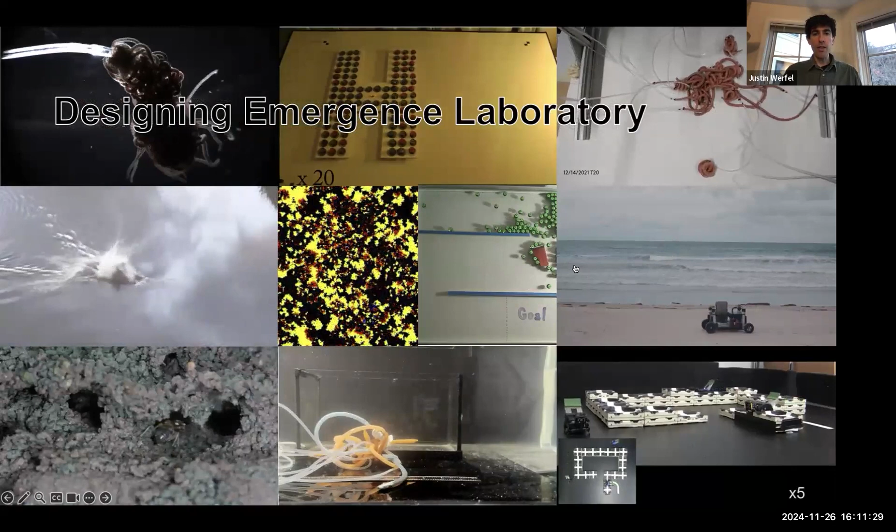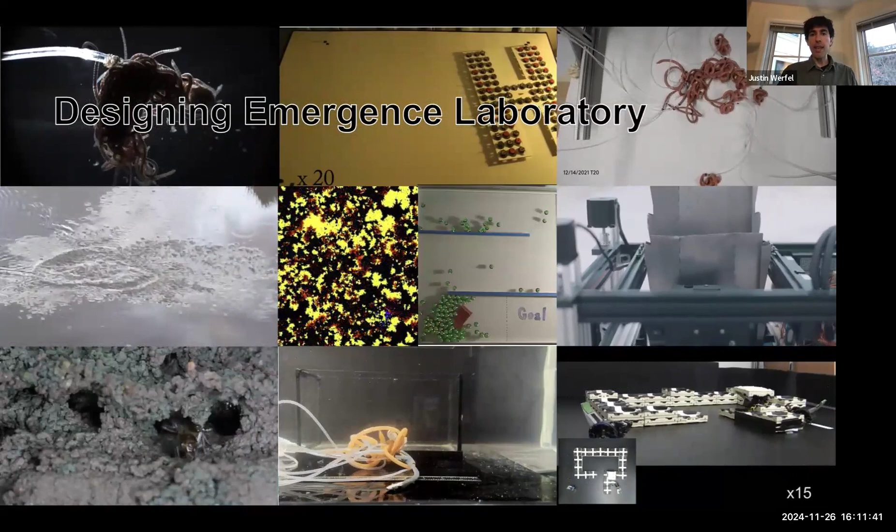So my group works in different topics in collective behavior. We study natural systems to get inspiration, and to get an understanding of what principles nature uses that we can then adapt, and then we engineer systems explicitly inspired by the biology, but not limited to mimicking the biology.

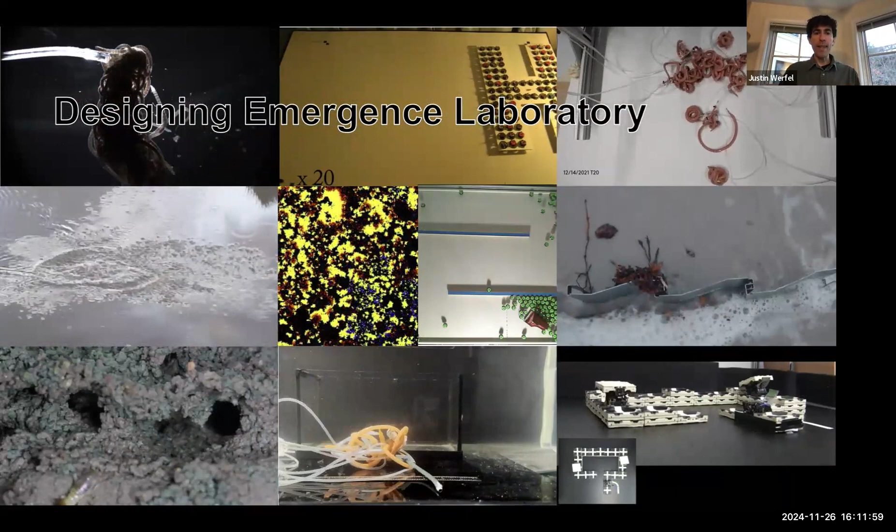The feature that all of this has in common is the collective part of it, right? It's that you have groups of many independent agents that together are doing something interesting beyond the capability of what the individuals can do.

So there are two different kinds of questions that we ask. And I can't seem to advance this slide, so give me a second.

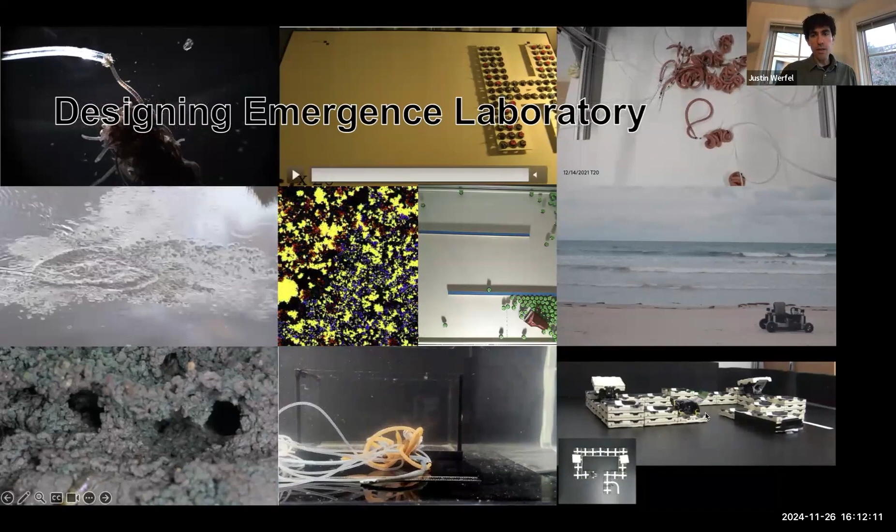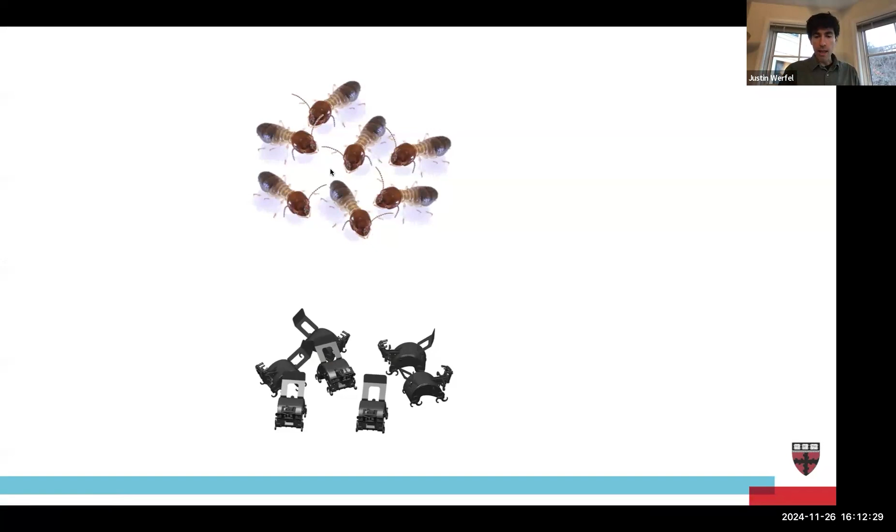Okay, so in studies of natural systems, the questions that we ask tend to have a scientific flavor. For instance, suppose you've got a group of mound-building termites, and you look at the thing they do together, in this case building a mound. The forward question of emergence is how is it that the individuals and the rules they're following, the behaviors of the individual agents, lead to these collective outcomes?

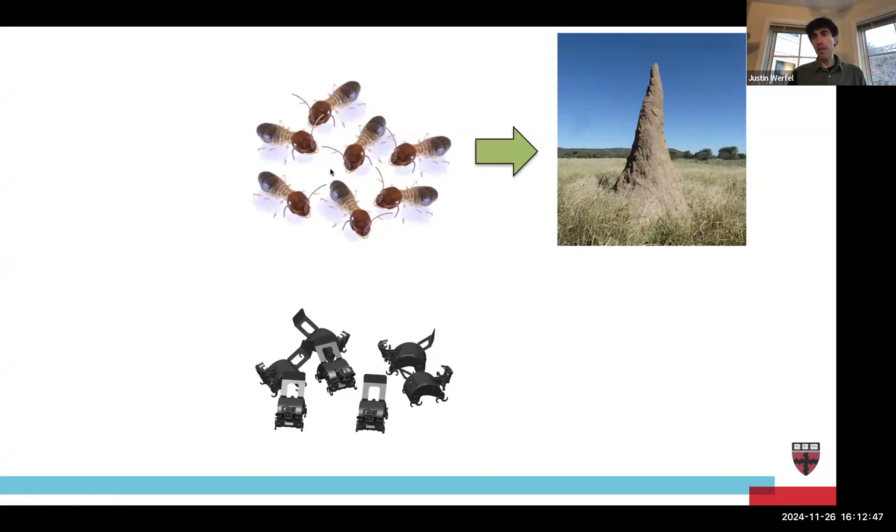Then for an engineered system, we ask an engineering kind of question. There's a particular outcome that we want to ensure. Suppose, again on the theme of building, that there's some specific building we want to construct, and we want to come up with a set of rules for the individual agents to follow that will lead to that outcome and not to something else.

The things that make all of these different topics challenging but also really interesting are the usual things I think you've been covering in the seminar course, right? Everything is unreliable, is limited, is unpredictable.

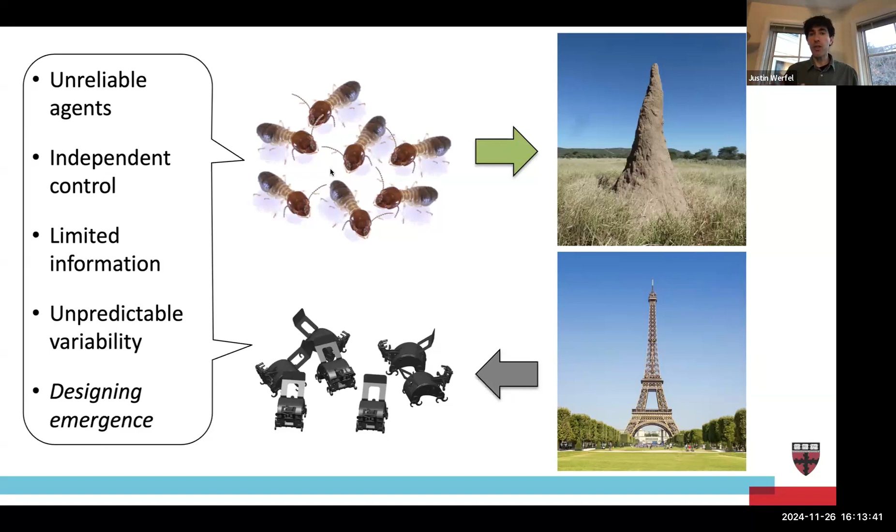In general, we don't have principled ways of connecting these individual and global levels of description of the system. We're looking for ways to connect those, and if general principles exist, great, but right now we try to do things really on a case-by-case basis in order to make some progress.

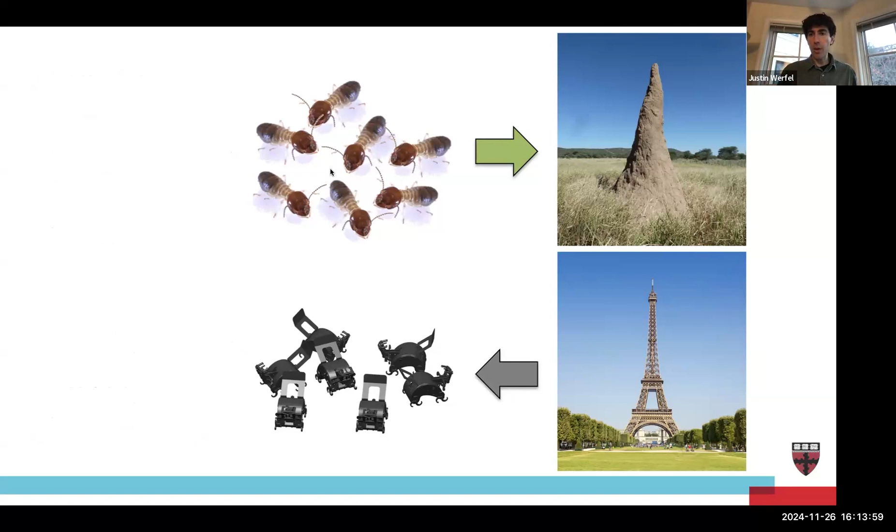These days, everybody is very much focused on AI in the modern machine learning sense. So I'm going to wave my hand in that general direction and say there's obviously a direct mapping of what I'm showing here onto neural systems. On the natural side, individual agents are individual neurons, and the collective outcomes are things like cognitive phenomena.

Engineering-wise, you've got some particular thing that you want a robot or an agent or an artificial intelligence to do. And the recently very successful way of doing that is you have some learning rules that let you train a network of units to produce some approximation of that behavior.

The thing that I would point to as being a meaningful distinction between these systems and the kinds of systems that I want to focus on in the rest of this talk is what you might call—and in fact the Philosophical Transactions of the Royal Society called—the difference between liquid brains and solid brains.

So a solid brain is, for example, a brain, right? The important thing, I guess, is about the persistence of the connections. In a solid brain, if you've got one neuron affecting another neuron, the strength of that influence may change, but in general you can expect that in the future that same unit is going to influence that same unit. You have some ability to rely on the connections being persistent.

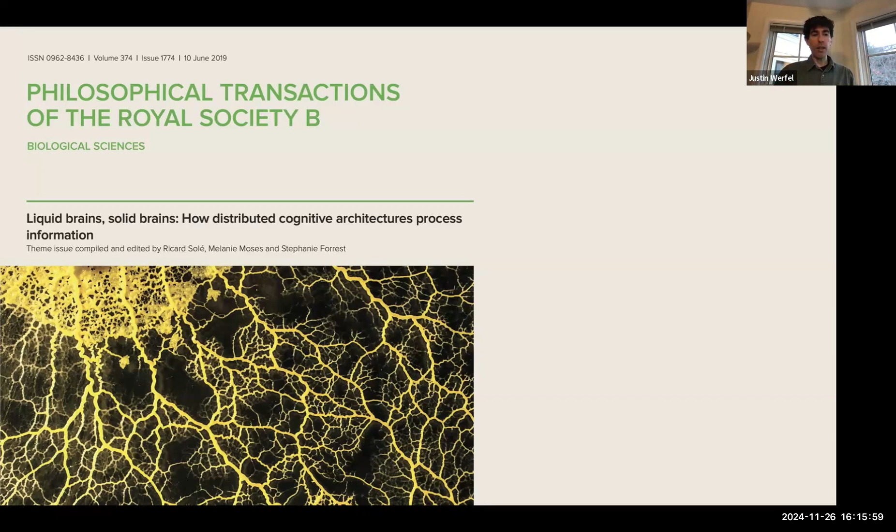And so there is, in a sense, that much more flexibility, but there's also less to rely on, fewer regularities, fewer things that are consistent. And so you can ask, if you have one of these liquid brains, how is it that such a brain can learn? How can it store information if there are no persistent connections between units?

So there's a few different places where that information can be stored. I think the most obvious one is that the individual units, the single robots or the single ants or whatever, they can individually learn.

You can have information stored in the interactions between agents. So, for example, if you're talking about things like formation control, which you might have talked about in a previous lecture, the way that relationships get set up, even if it's not long-term persistent, you can store information in that, if relationships hold at least short term.

The one I want to focus on is this third one. This is, I think, sort of the classic one for social insects. So it's not storing information in the agents at all. It's taking advantage of the thing in the environment that is actually persistent, since the locations and relative positions of the agents are not persistent. But the world tends to stay where it is, right?

And so if you can put information into the environment, it's available, hopefully later, in the place where it's relevant. So for social insects, that broad idea is usually called stigmergy.

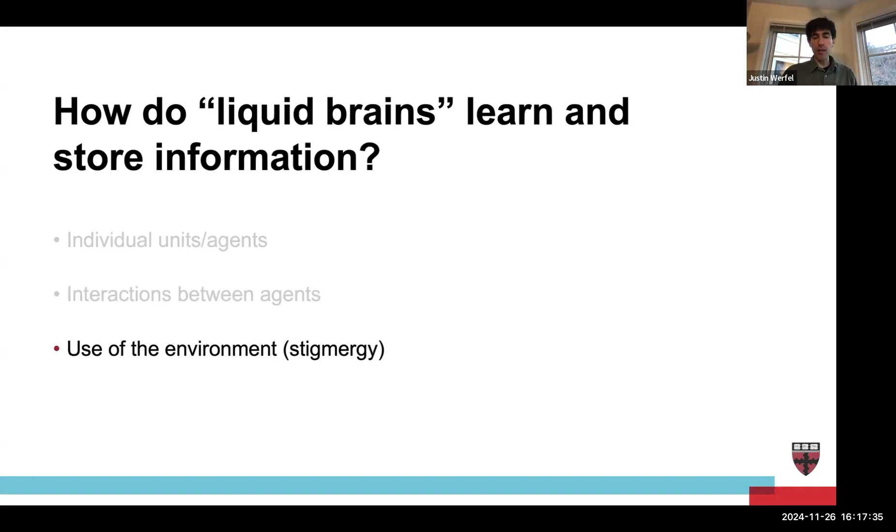I think the most famous example is ants with their foraging trails. They're leaving these pheromone trails in the environment, and it's basically physically embodied. This chemical in the environment is telling ants that come to that place that there's food at the end of this trail, that there's something worth following, and that information is stuck to the ground.

Another particularly compelling example of stigmergy is the mound-building termites you get in Africa and Australia, and to a smaller scale in Asia. Here you've got colonies of millions of these individually limited agents—I used to say simple, until I got a chance to study termites. I will never say simple again describing termites—but these millions of limited agents literally blindly build these huge, complicated structures.

So the conventional wisdom for the last 60 or 70 years has been that the way they coordinate their behavior is through the use of what's called a cement pheromone. The idea is one termite will come and put down a blob of mud someplace that it has put some pheromone into, and then another termite comes along, encounters that first blob of mud, and responds to the pheromone by putting down its own blob in the same place.

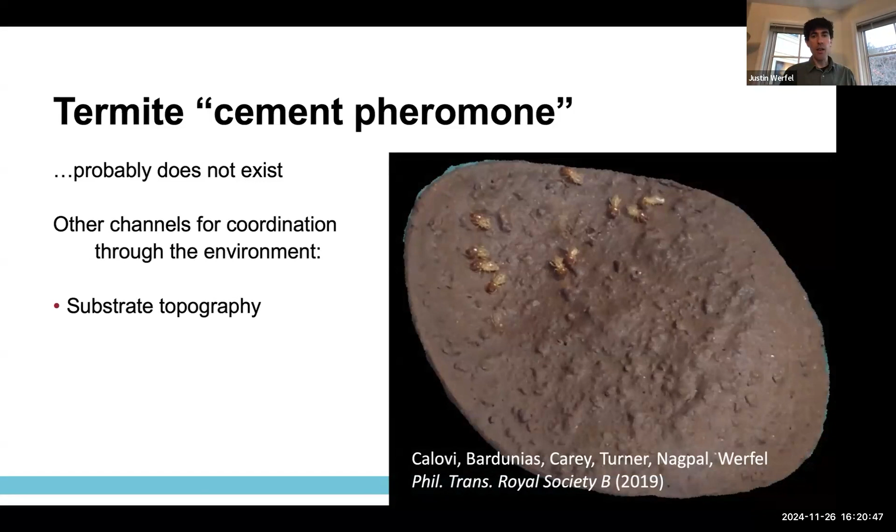So there's that feedback very immediately through the environment. Another thing they look at is sharp changes in humidity. Particularly, this is something that looks like it affects how they expand the mound. There's a sharp transition between very humid air inside the mound and

very dry air outside it. And depending on the time of day, the location of that boundary changes. I don't have time to go into a lot of detail about this, but it looks like that is kind of the driving thing that leads to their expanding the mound at night, but closing it off during the day.

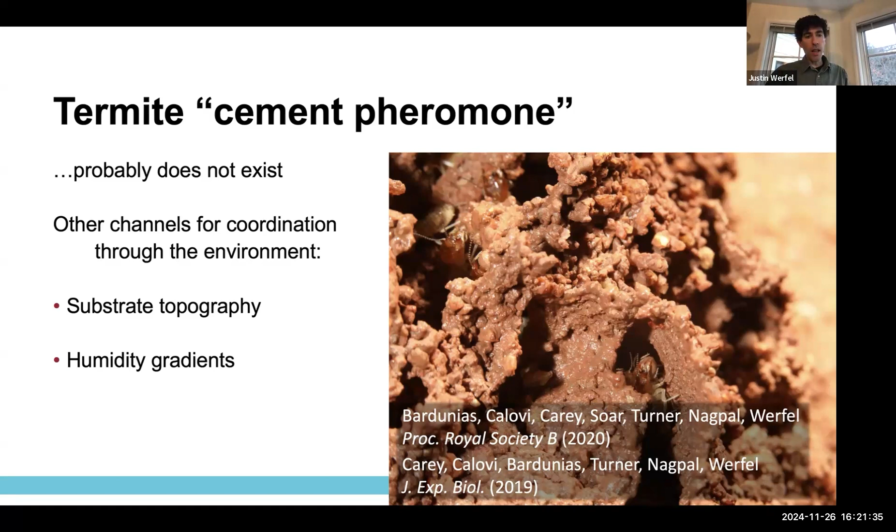Another thing they pay a lot of attention to is what others are doing, which I think, in retrospect, was not surprising. Termites are really closely related to cockroaches. They're really sort of a social form of cockroach.

And of course, there are studies you might have discussed in previous lectures where people can get cockroaches to modify their behavior, essentially through them watching what each other are doing, right? A cockroach will let the behavior of other cockroaches influence its own behavior. So it's not surprising that that would be the case in these social cockroaches.

In particular here, the thing that showed up is that they pay a lot of attention to where and when others are digging. So if a termite comes across a site where others are active, the more other termites there digging, the more likely it is that this termite is going to stop and join in.

And this study in particular really forced us to think differently about what I'm going to anthropomorphize as the termites' idea of what they were doing. We have always been very focused on deposition, right? The thing that brought us to study these animals is the construction, the building things up. So we're interested in when they put material down.

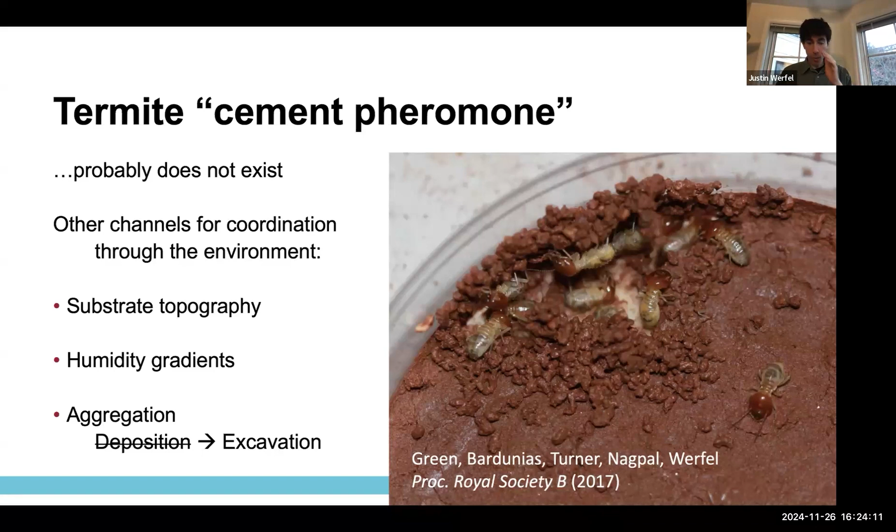It's surely a richer picture than that, but it's an example of going and really looking at the system forces you to think about it differently, and potentially to recognize that the way you've been thinking the system works is not the way it functions at all. Now, just because something doesn't work the way that you thought it did doesn't mean you can't be inspired by it.

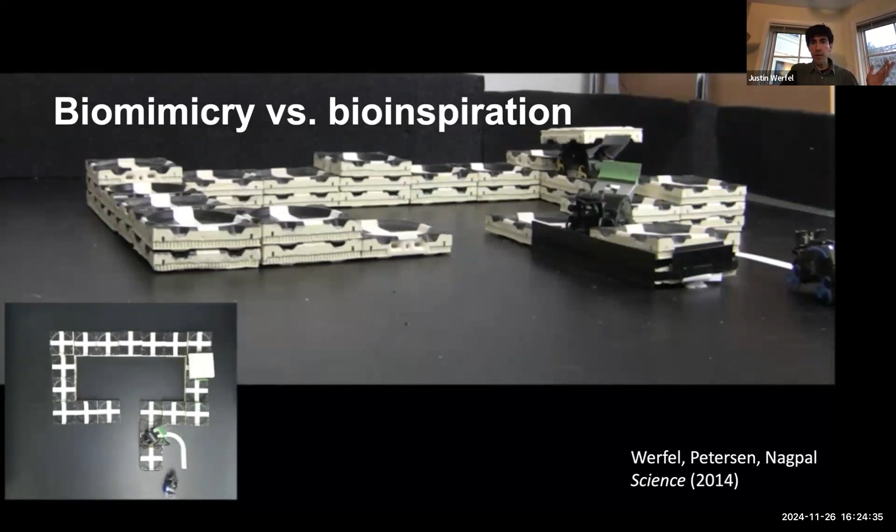So I kind of alluded to this earlier. Biomimicry is great in the sense that nature gives you an example of something that works and has had billions of years of evolution to tune something that's going to be very effective at whatever that thing is.

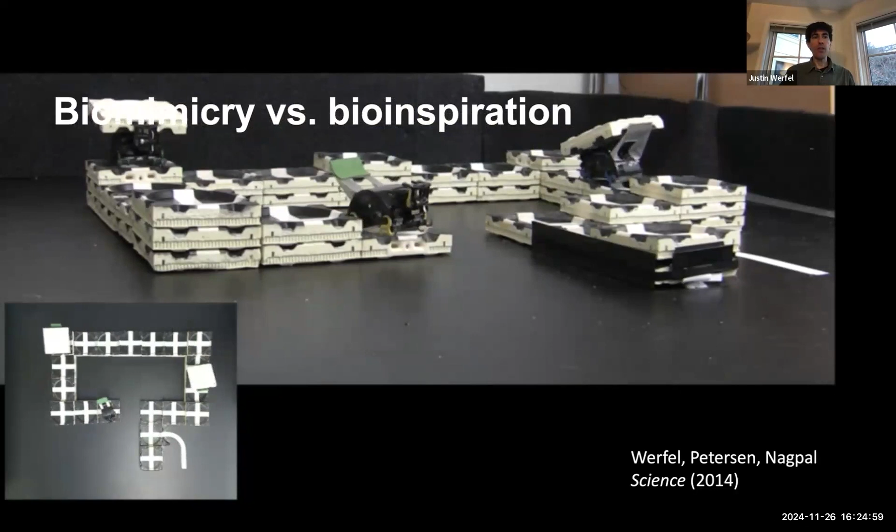But the animals that have evolved have a lot of constraints and a lot of competing goals, right? The termites need to do a lot of things, not all of which are things that you would want an artificial system to do. So if you're very attached to copying something in nature, you may be working under limitations that are not actually relevant to your engineered case.

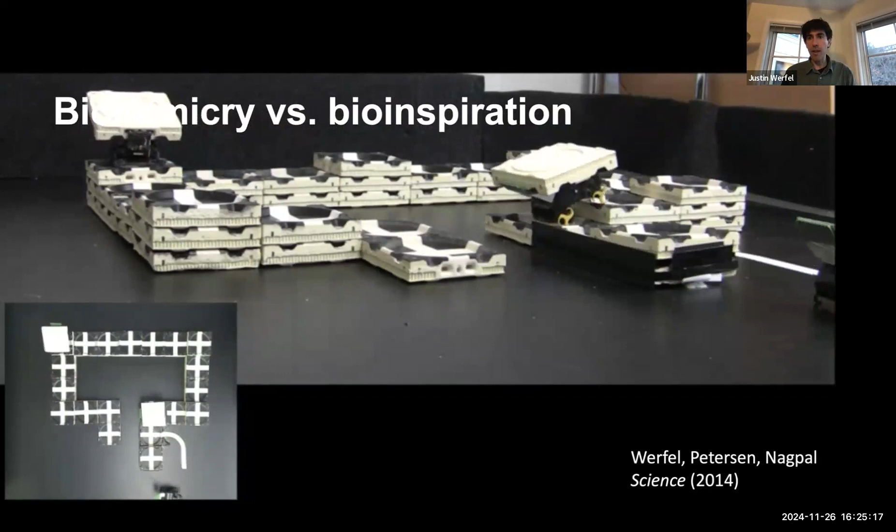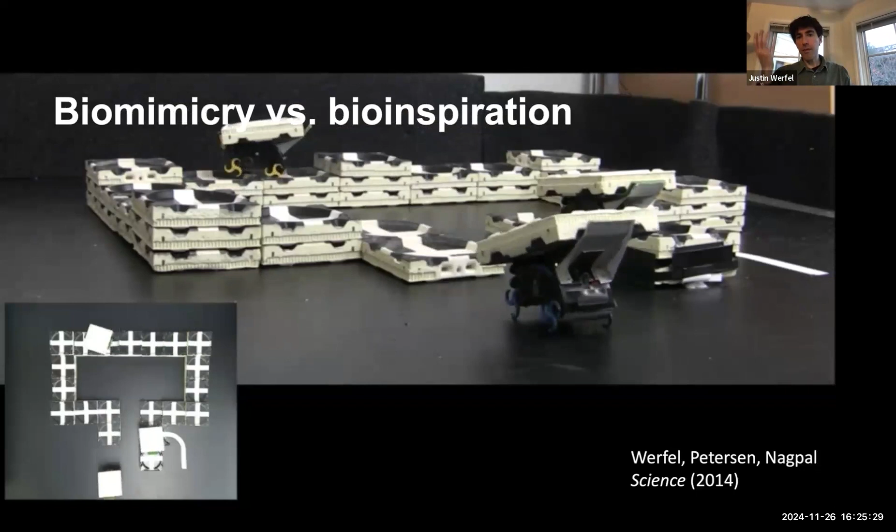So bioinspiration, you use nature as a starting point and then you just go off in whatever direction is productive. So to briefly tell you about this system: this is a multi-agent system of a team of construction robots inspired by mound building termites, and we tried to make them limited. These I can actually more safely describe as simple. We deliberately made these robots limited in ways that we think of the termites being limited.

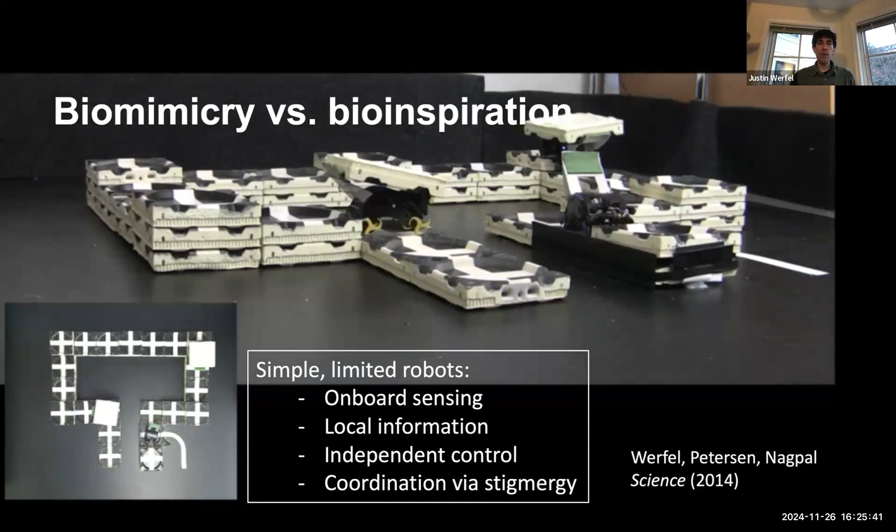In particular, they don't have access to any kind of global information. All they can sense is what's right around them using sensors in their own bodies. And they're not talking to each other the way you would normally have a team of robots talk to each other.

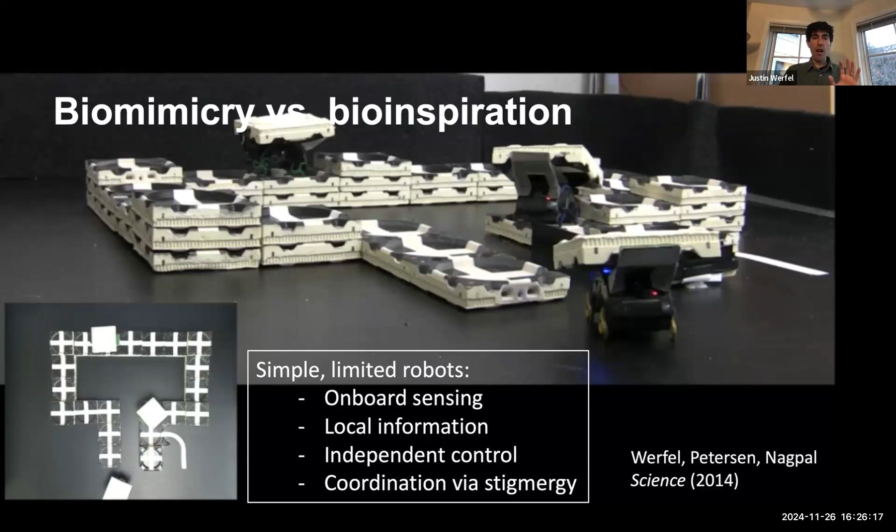There's no broadcast messages. Everything they're doing is through stigmergy. They're looking at the local configuration of material around them, and using that to help them decide what to do. As they build, they're changing local configurations, and that feedback loop is what leads to the structure growing, emerging from the set of rules they're following.

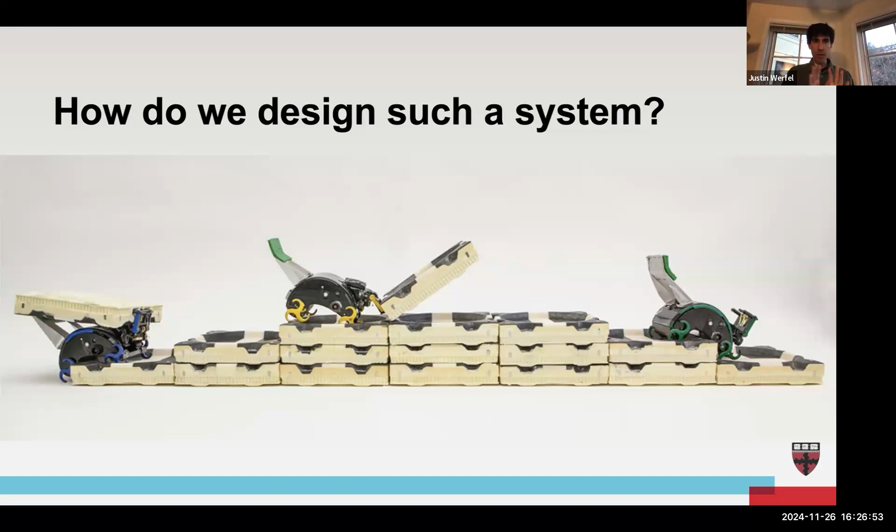As I said at the beginning, in general we don't have a well-established way of doing this kind of thing. So when we set out to build this, there were two big ideas I would highlight as being behind getting this to work. I don't want to claim these are our ideas—they're well-established big ideas—but I'll point to them as being especially relevant for this system. The first one is harnessing the environment.

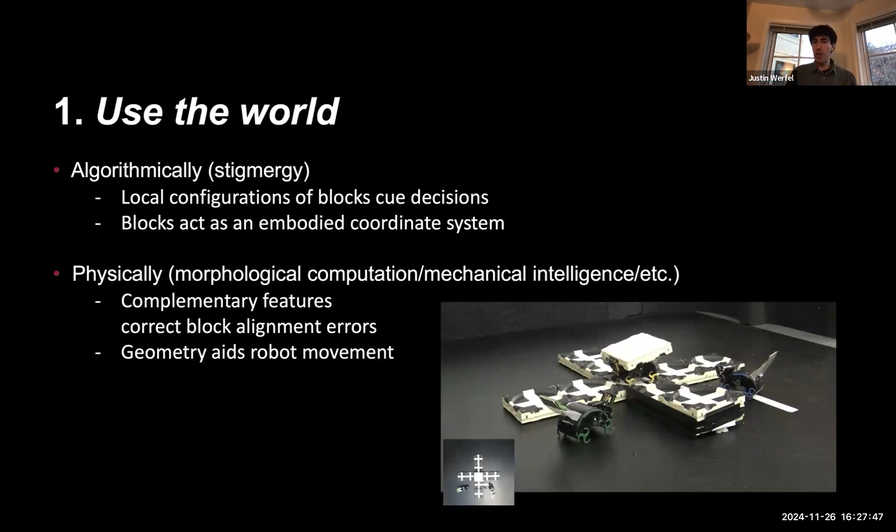...the structure that they're building can actually become the coordinate system that they use for reference and build with respect to. That's part of the reason for these crosses on top of the blocks. As they move around, they see these patterns of black and white changing underneath them, and they use that to keep track of where they are.

And then physically, there's this broad idea—hopefully this has come up in other lectures—of morphological computation or mechanical intelligence. There are a lot of different names for this. Basically, you make the physics of the world handle something for you, so your job is easier.

From the robot standpoint, the robots are imprecise. If they're building, they need to arrange things precisely. So rather than make the robots much more capable—really able to manipulate these materials carefully and put them down in precise alignment—instead we give that job to the materials. There are physical features on the blocks that make sure they're precisely aligned if the robots get them to about the right place. That allows these unreliable robots to reliably build the larger scale things.

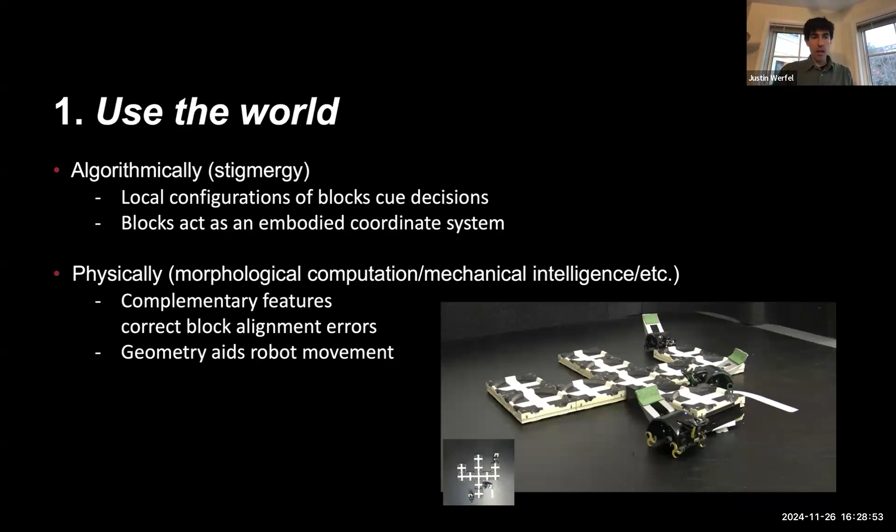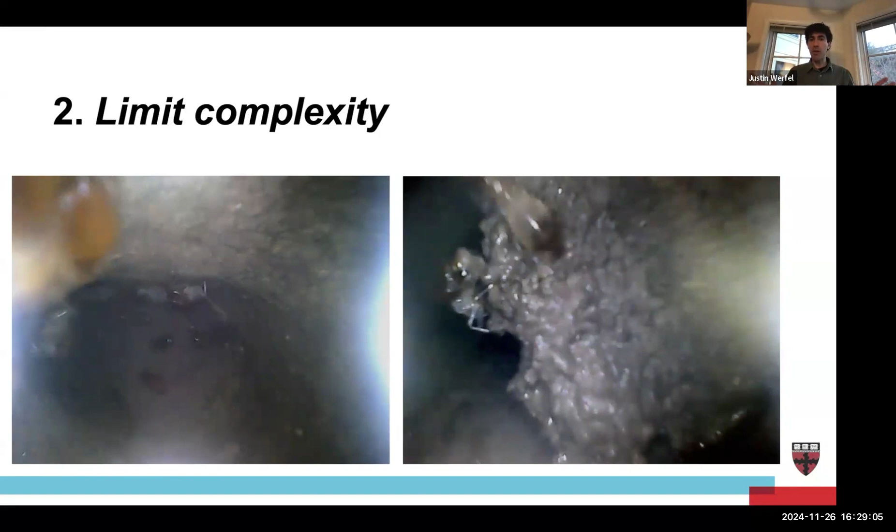So that's one big thing. The other big thing is, ironically for trying to design a complex system, we're going to limit the complexity. This is a thing we do all the time in engineered systems. If you look inside a termite mound, you see a big mess—there's a lot of termites running around. It's a very uncontrolled looking system, and there would be a lot of difficulty in coordinating things under those circumstances.

We don't ever try to coordinate multi-agent systems without putting rules in. The most immediate example: if we have a gazillion independent drivers all driving on the roads, we don't force them to avoid each other in a giant game of bumper cars. We impose rules—we put directions on highways—and that lets people drive very fast without having to pay very close attention to make sure they're not going to run into somebody coming the other way. A similar idea applies here.

So we wound up with two different sets of rules. There's a set of what amounts to traffic laws—highways being in one direction or the other—that keeps them flowing through the workspace without conflicts. And then there's a set of safety checks that ensures they're not putting down blocks in situations that will lead them to build themselves into a corner where they can't keep making progress.

Those two sets of rules together interact in such a way that you can guarantee they will always be able to keep making progress toward a structure whose picture you give them to start with—they won't get stuck along the way. This lets you give the system a high-level description of what you want them to build, which essentially compiles into a set of rules that the individuals follow that will provably lead to that outcome.

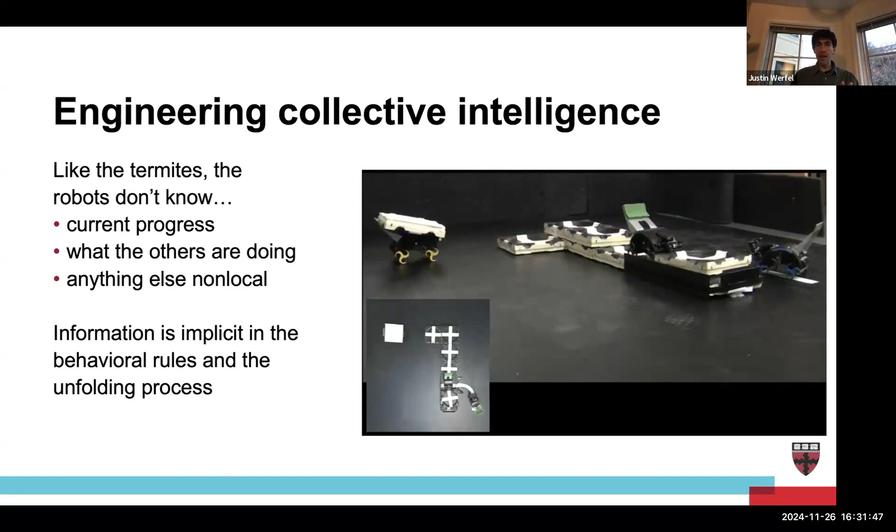In both cases, the agents don't know the high level state of what they're trying to build. In the case of these robots, the information about what they're trying to build is in the rules. That information content is contained in the rules somewhere. It must be, or else you wouldn't have a guarantee of getting that thing.

But it's not necessarily interpretable. It's not something that, if you're a robot or if you're a human just looking at the robot rules, that you're going to be able to extrapolate from that and say, oh, I see, they're going to build this thing. So that information is in the rules, it's in the building process as it occurs, but it's really something that's happening at the system level and not something at the level of the individual robots.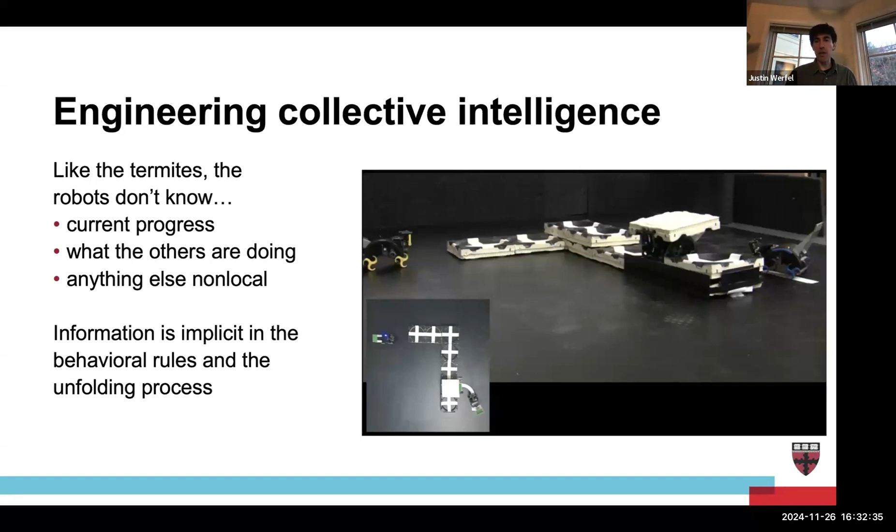As I said a second ago, usually when we start a construction project, we have a blueprint and then we give that to the contractor. That's not quite true. We start with an idea and we go to an architect and we ask them for a blueprint, and they give us a blueprint, and we give that blueprint to the contractor. So a further extension of this kind of thing would be to skip the architect as well.

To do something that is actually more like what the termites are doing and build something that is suited to the environment that it's in. So this cartoony example is, let's suppose you want to build a bridge across a river, but you don't want to have to go and survey very carefully the terrain on both sides of the river. You don't want to have to figure out exactly what's going to be built to fit into the space. You just want to send a bunch of robots with a bunch of building material and tell them, I want a bridge across the river, and have them just go to it.

So they're going to again be responding to the environment. As they build, they'll add material where they need to add anchoring or counterweights, and eventually, as they continue to extend this cantilever, it can make its way across the river. And so the goal here is to be able to get something that is functionally specified rather than blueprint level specified.

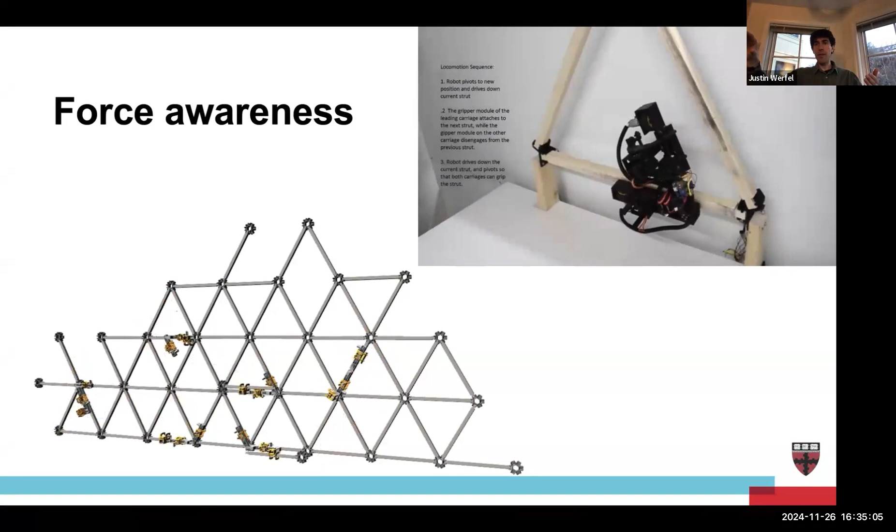And the thing they're paying attention to is forces on the structure as they travel. And so the longer the unsupported cantilever gets, the more stress is going to be working to break it. So the structure itself could break like this, or the whole thing could actually just tip and fall into the river if it's not anchored. And so those are two different failure modes that we'd like to avoid.

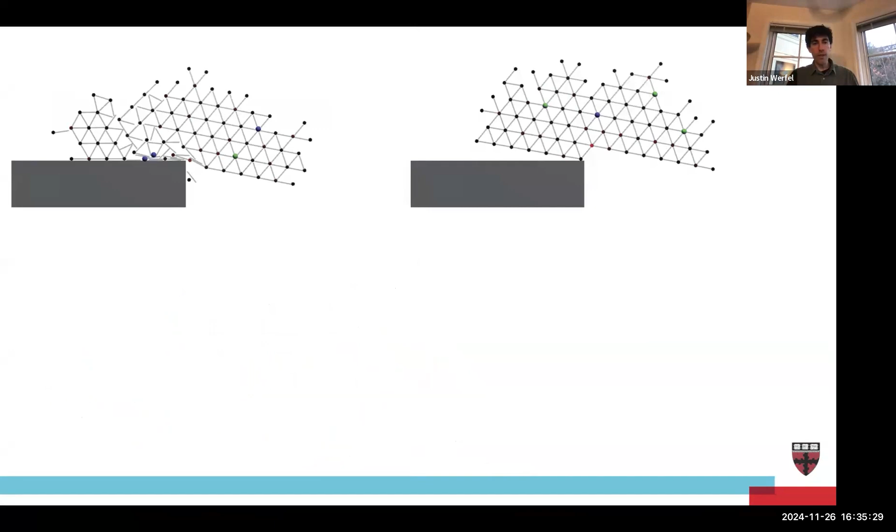And we wound up just finding this heuristic, basically, that if you look at the forces—these red and blue marks here, where this strut plugs into this node—there's force sensors here, just like pressure sensors on opposite sides. And the heuristic was if the difference in those two forces gets to be too large, then that is an indication that you shouldn't go out. The robot that comes here and measures that should not go out onto that strut, should go somewhere else.

And that's not a lot of information, but that little information is enough to make it possible to build much, much longer cantilevers, on average, before they fail.

So this point about force awareness, I think, is something that I think is going to be important in more physical systems.

I want to very quickly talk about the beginnings of some work on a different, again biologically inspired system. The biological system here is California blackworms. These are independent worms that, under the right conditions, will entangle together into blobs, and the blobs can be arbitrarily large. When the worms are in this entangled state, they can actually do interesting things. They move around.

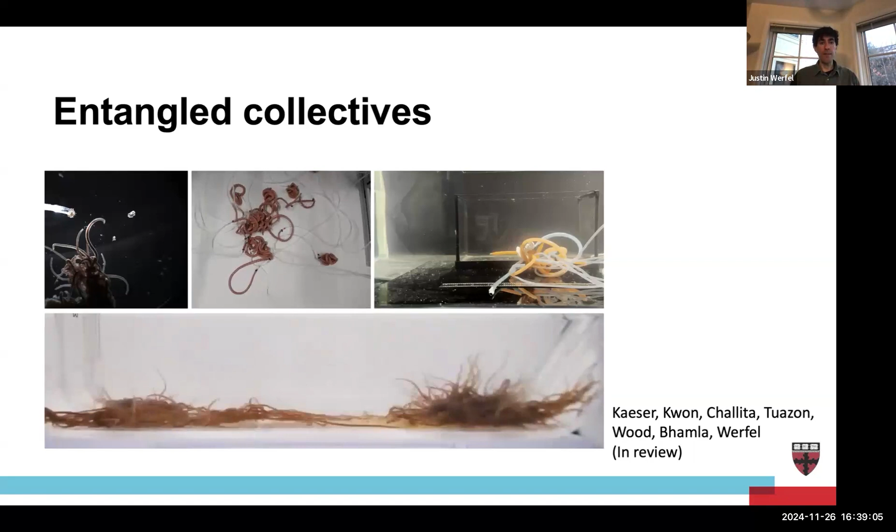This is work that's just getting started, but I think this is an exciting project that I'm looking forward to seeing how it develops.

One more example I want to give of a natural system, and in particular a collective construction system, is beavers. This is going to be another story where the moral is sort of like we set out to study the system where we thought we knew how it worked, and it turned out that when we went and looked more carefully at nature, it turned out that nature was doing something different than the conventional wisdom.

So beavers, they're a collective construction system. They don't have millions of individuals in a colony the way that termites do, but they have maybe a couple dozen in a family, in a colony. And of course they build, right? They're most famous for building dams.

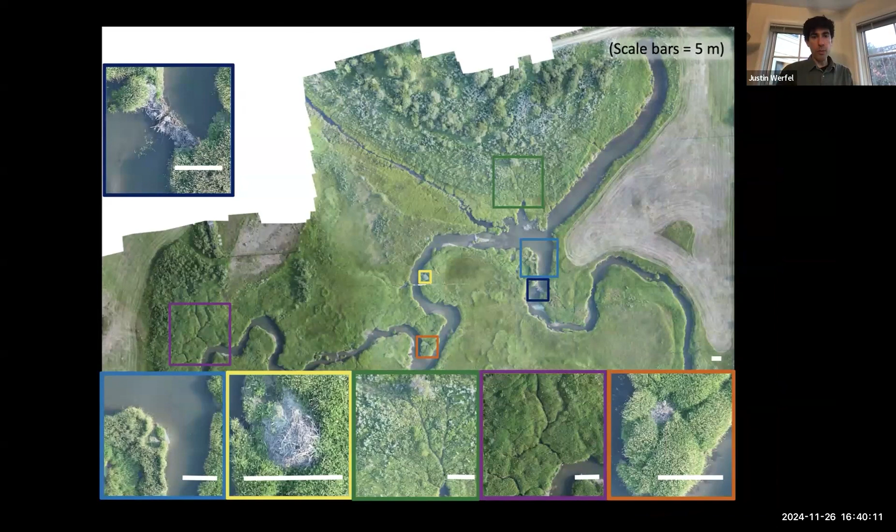But actually they build a lot of other kinds of structures as well. It may not be useful for me to go through all of these, but just to focus on two of these in particular that I want to emphasize. In addition to the dams, they build trails and they build canals.

The trails are where they clear vegetation from an area on land, and the canals are where they're excavating a passage that floods with water that they can swim through.

Both of these are things that happen at very large scales, and in particular at much larger scales than the dams. The dam is the showy thing that, if you're thinking about beavers and you're going to go out and look at beavers and say what's the interesting thing they're doing, it's the thing that's going to catch your eye.

And it's the thing that I think makes them nature's engineer, right? It's the thing that makes them sort of compelling to us, is they build these big things, and the dams that they build then have these transformative effects on the landscape around them.

But if you pull the view back, there is something else they're doing that's much larger scale, and I think takes a lot more of their effort. Now, if you pull farther back, it's actually very difficult to study beaver construction. It's difficult to study the process even just of dam construction. Beavers, they're nocturnal.

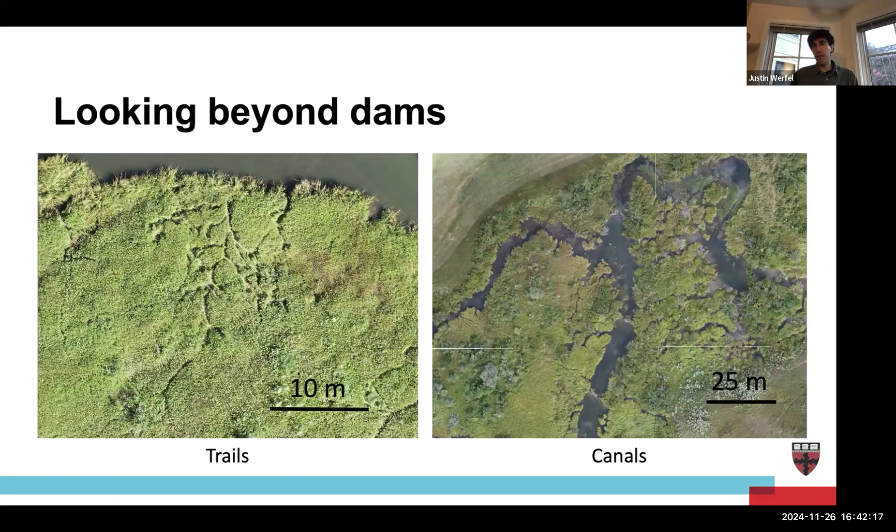They're very shy. If you get near them, they may abandon an area if they start to feel crowded by somebody trying to observe them. They spend most of their time underwater, and starting a new dam is a rare event, so it can be very hard to catch the initiation of a new dam. And a lot of their habitat tends to be heavily wooded, so it's hard to get a broad view of what they're doing when there's all these trees in the way.

So if you're Jordan Kennedy, what you can do is take a bunch of drones and various other equipment, and travel to a number of sites across Montana, and monitor many kilometers of streams weekly over the course of a whole building season. She did this in an area where there's relatively little overhead cover, so that drone surveys can actually show you details of what the beavers are doing.

This is in Montana. There's a lot of mountains and snowfall in the winter, and then in the spring, the snow melts and there's a spring flood, and that meltwater will wash out a lot of the dams that the beavers had built in previous seasons, so they need to do a lot of building from scratch. Those two things together mean that it's possible to see a lot of beavers build a lot of dams, and to see it in high detail over a building season, high detail both in space and in time.

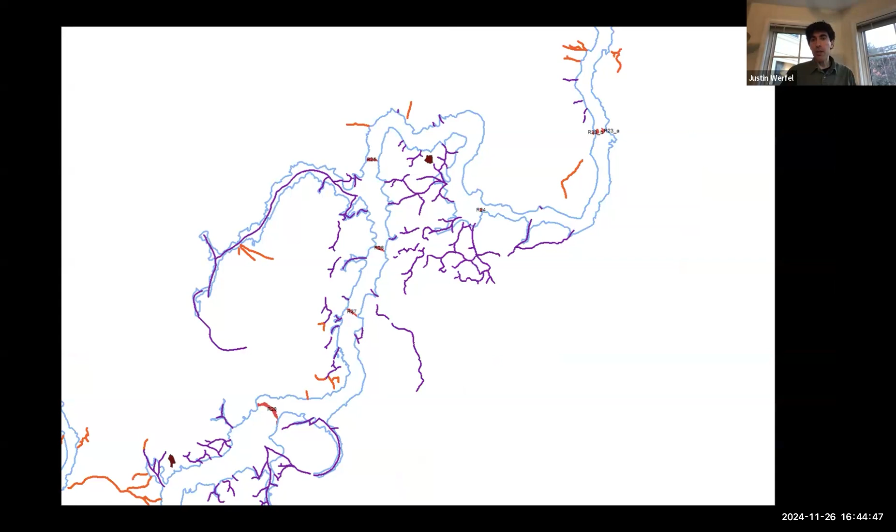The traditional answer to both of those questions is based on the sound of running water. The idea is that when and where a beaver hears water flowing, that is where and when they're going to build. A little reflection kind of immediately says that can't be the whole story. If that were the only thing beavers were responding to, they would spend all of their time trying to dam up waterfalls. And they don't do that.

They do something smarter. With the benefit of this kind of data set, you can look and see they're not just building all the time—they are waiting to start building until the water level subsides to a level that can support their building. That is, they're not trying to build dams over and over and having it just keep getting flooded and washed away by the flow. Eventually the flow subsides, and the dam they keep trying to build finally can stay without getting washed away.

Obviously, I think that's not a thing that would be energetically favorable for them to do. In fact, they are waiting until the water gets low enough, and then they start building.

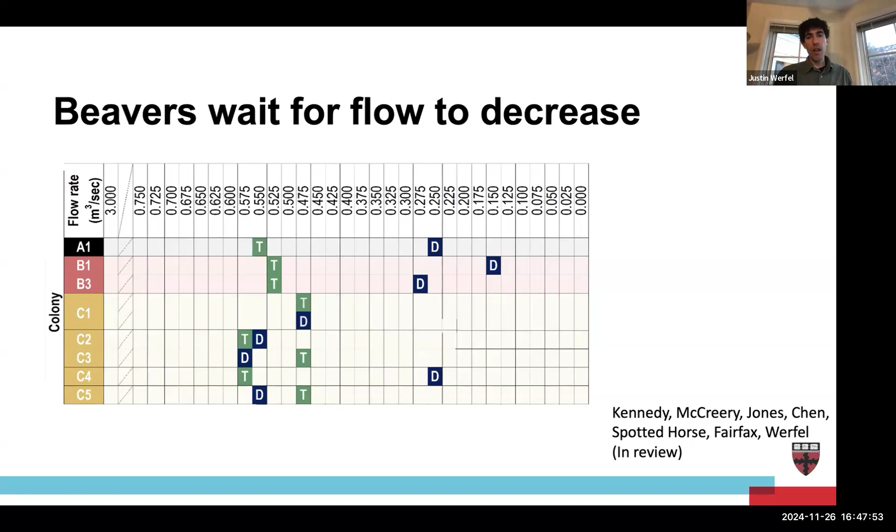A remark about the canals. Canals are something that beavers build over many generations. They'll excavate a bit over the course of one season, then if they've been using it, they'll excavate it further the next season. If there's a canal that they have not been using, it will silt up and fill in.

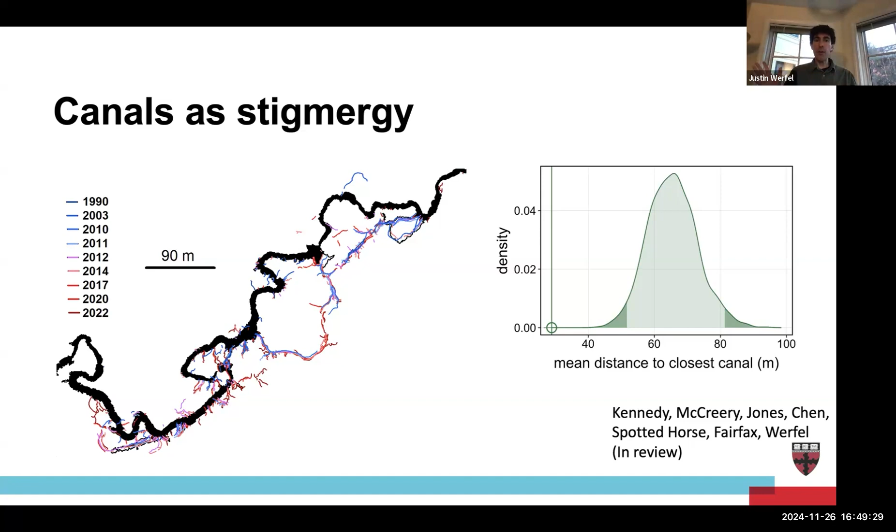What is the meaning of the canal? This goes back to the question of where do they build? They build trails by the canals. Basically, the canals are telling them where to build. So again, go back and look at nature, and it turns out the story is richer than you thought. But also, look at the bigger picture, broaden the view.

I want to say a few words about cooperative manipulation. So a bunch of agents, perhaps ants, but perhaps robots, working together to move or manipulate something that's too large for individuals. And I feel like a lot of work on this topic falls at one end or the other of the spectrum.

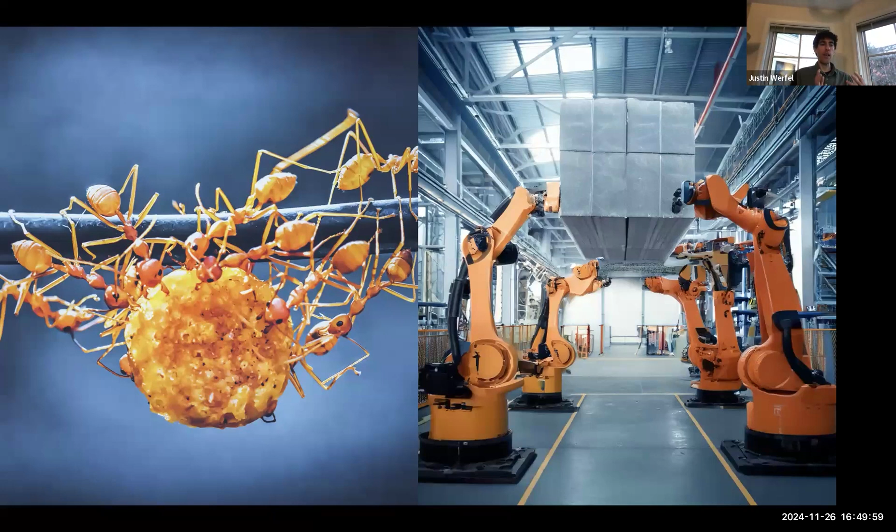At one end, you've got things like studies of natural systems where the description is very phenomenological. You can say things about how you predict the transportation is going to occur, but you can't necessarily say much about, if you wanted to engineer a system based on this, how to control the agents to get any particular kind of outcome. You can't have careful performance guarantees.

And then on the other end of the spectrum, you've got robot systems, where you can bring all of the power of formalism of robotics to it, and you get a lot of power in terms of being able to guarantee particular kinds of motions. The cost of that is that you need a lot of information. The individual robots need to know a lot about the geometry or the mass distribution of the thing they're trying to move. They may need to know how many other robots there are and those other robots' locations.

And that's information. Also they typically need to be in close, broadcast style communication with each other all of the time. So again, that's a lot of infrastructure to build up. I think there's really room for something in the space in between.

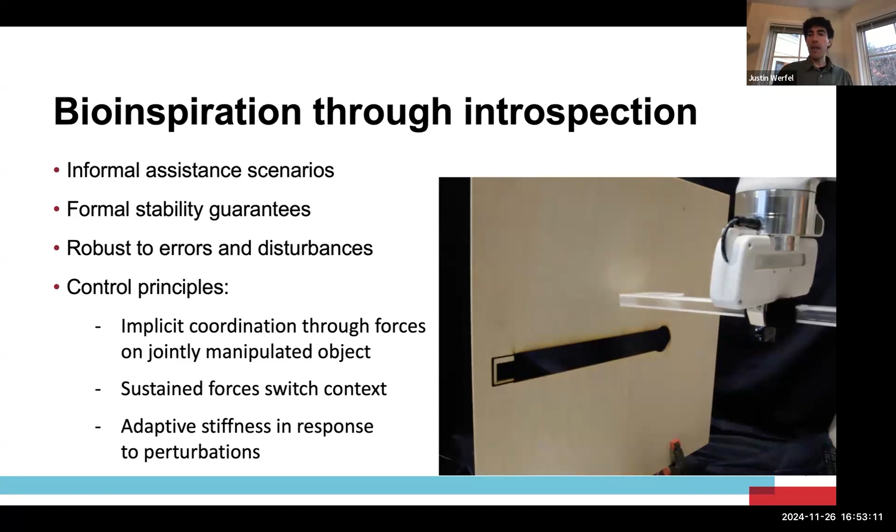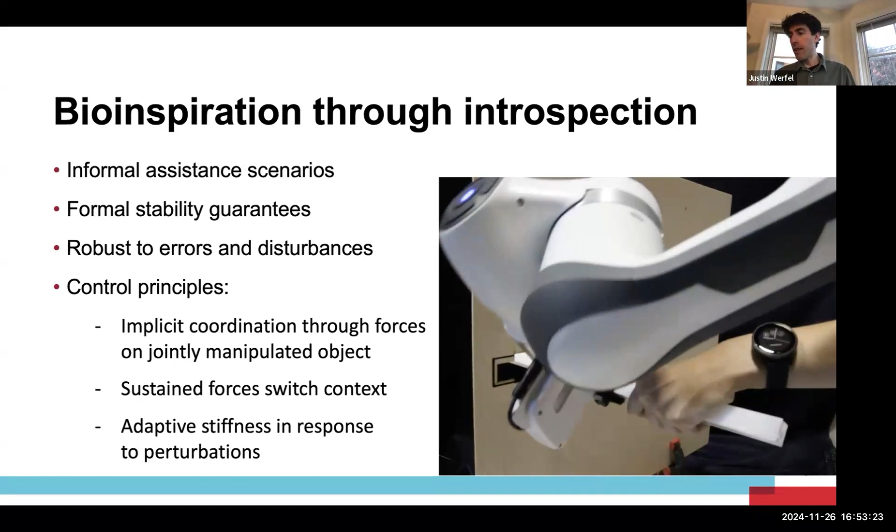I guess the duration of a force you feel affects whether you interpret it as a signal or a perturbation. If the thing is being pulled in one direction for a long time, you may reasonably interpret that as a signal: the leader wants me to move it in this direction. Versus if something just bumps and that disturbance goes away quickly, that's something you can interpret as a perturbation that should be rejected.

So the leader can hold a force for more than a few seconds for the robots following to interpret that as, okay, let's start moving it in this new way. And if something bumps into the table, you can picture yourself stiffening up—you make sure the thing is stable as your first priority, and then when stuff has stopped moving and it seems safe to relax, you gradually relax.

So we have the robots doing all those things—oh sorry, that's the next topic. We have the robots doing all those things.

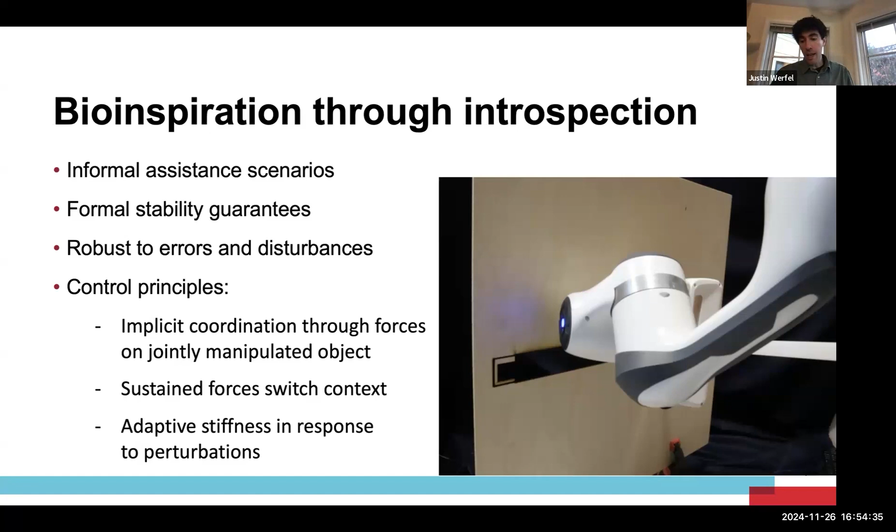The idea here is that bioinspiration in general is the topic. Usually when we talk about bioinspiration, we're looking at non-human animals. I'm bringing this up as an example where human animals are actually also a very good source of inspiration in some cases. A couple more things I'm going to try to talk about quickly.

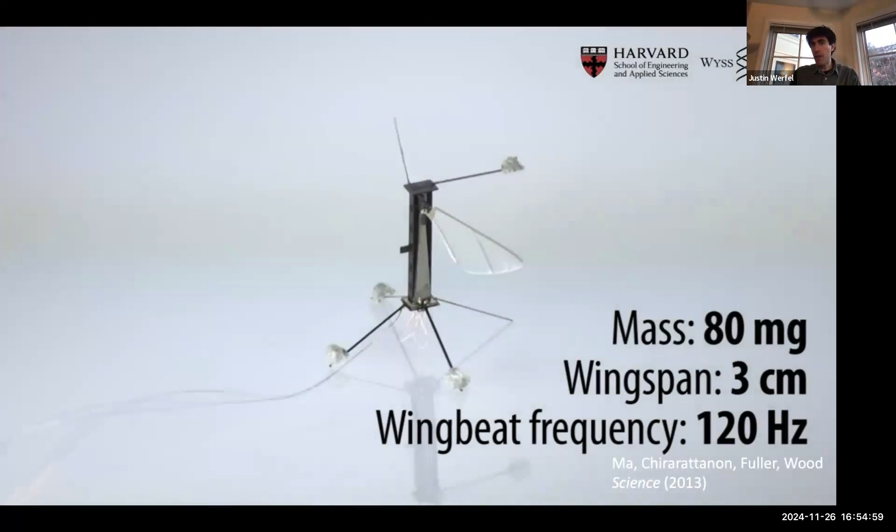So this is a different project, not my work that I'm showing here, but 10 or 11 years ago there was this demonstration of an insect-scale autonomous flying robot. Making this work depended on a lot of very careful engineering.

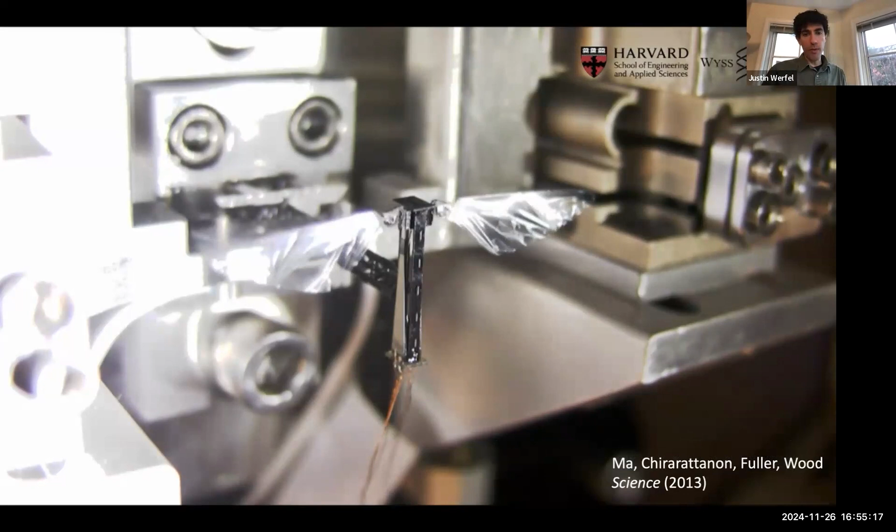And to the point about bioinspiration versus biomimicry, if you look at a bee, you can see that the trailing edge of the wing follows the leading edge—the wings are twisting. And there's a persistent myth that bumblebees can't fly, which is a weird thing for people to believe because obviously they do.

The idea is that the aerodynamics of an airplane don't work at bumblebee scale, and yeah, obviously a bumblebee doesn't fly like an airplane. But it's taking advantage of airflow phenomena at this scale, and the way it moves its wings takes advantage of the physics of the world. That's something you can really mimic.

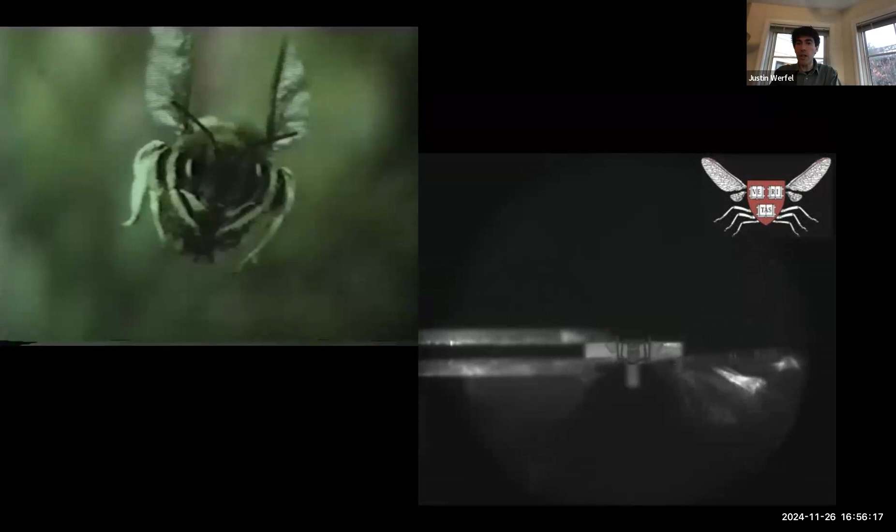So high-speed video of the robot shows it doing the same kind of thing, where the wings are allowed to passively twist, and that helps provide the lift that lets this insect-scale robot fly. So on one hand, it can be really useful to look at how nature does something and use that as a design principle and copy it. On the other hand, again, bioinspiration versus biomimicry—you only need to carry that so far.

If there's something that nature does that doesn't make sense to build into the robots, you don't need to build that in. I think the obvious example here is that bees famously communicate with each other using the waggle dance, and it would be unnecessarily difficult to build that into robots, where you could just have normal communication between devices.

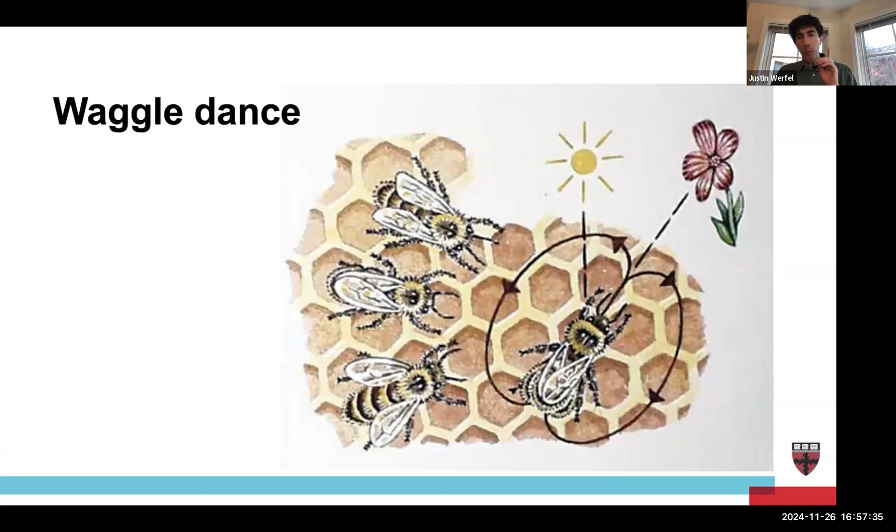I'm bringing in the waggle dance as one more example where if you actually go and look at nature, it turns out it's not necessarily what you thought it was. The waggle dance—discovering that bees have this dance language that encodes the location of flowers—won a Nobel Prize, and that is incontrovertibly true. But the surprising thing is that the bees watching may actually not pay any attention to what the dancer is telling them.

So there are various studies that have shown that most of the recruited bees are not going where the dancer is telling them to go. In fact, if you mess with the setup, rearrange things in such a way that the dancer is disoriented and sends recruits to the wrong place, it doesn't actually affect the foraging success of the colony. So I think there's a question here about why is there information in the dance if it's not something the recruits are paying attention to?

Again, this is the sort of thing where in retrospect it makes sense. If you simulate different kinds of environments, it may be better not to pay attention to what the dancer is telling you. It depends on the nature of the environment. If there are flowers everywhere, if there's not a lot of nectar per flower, if flowers take a long time to get replenished, then you actually don't want everybody going to the same place, because you'd be putting too much effort into a single resource that's too limited. It's better in some cases, not all, to have foraging more spread out.

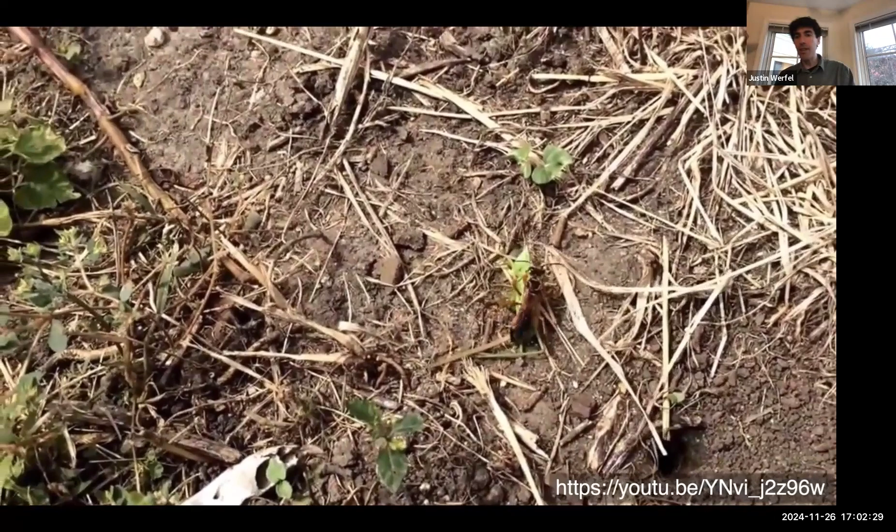The wasp grabs the cricket, brings it back, drops it 1 centimeter outside, goes into the hole. And so it looks like this is a behavioral program that you found a way to interrupt, in a way that reveals its limitations. This is supposed to prove that the wasp doesn't know what it's doing — it's following this routine of always drop the cricket and go inside, even if it doesn't make sense for it to do that.

There are some problems with the story. First of all, the idea is that you've managed to reveal that the insect is actually not smart, it's a robot. You've found a way to catch it in a behavioral loop that would be maladaptive. This doesn't actually happen in nature, so it doesn't normally happen. But you can pull apart the layers and show, okay, this is not actually an intelligent animal.

There's again this theme of the environment being the thing that is storing the information, right? So the wasp is not remembering, I have already checked inside the hole. It's using the presence of the cricket just outside the hole, when it comes out, as the information that it's already checked. And if you move the cricket, you're erasing that information from the environment.

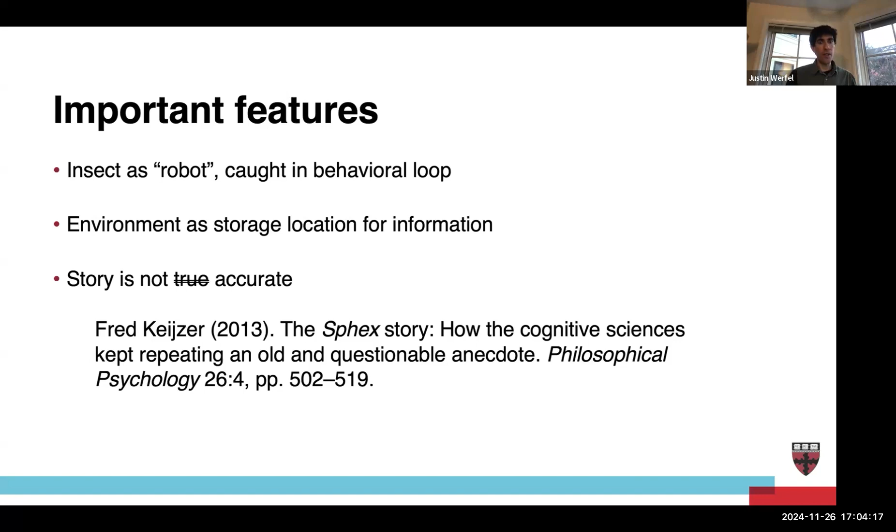But another problem with this story is that this is not actually really the way the wasps go. It would be more accurate to say it's not accurate — it's not exactly that it's not true, but the way the story is told does not appropriately describe the system. There's a paper on this that I love from 2013 that really digs into this and tears it apart. I'm going to just summarize this very quickly.

So a couple of problems with it. First of all, it is not actually the case that when people tell the story, they say you can just keep moving the cricket absolutely forever, and the wasp will keep doing it forever until it starves to death. That's not actually true. Even the original report of this, all the way back to Fabre in 1879, who first observed this happening—

in that same description, he said, okay, and then I did it with some other wasps and it didn't work. The next one I tried 2 or 3 times, and the wasp didn't drop it outside the burrow, it just took it in. And some of them, maybe it would take a few more tries before they gave up and just took the thing inside. But it's not actually true that they will just keep doing this forever.

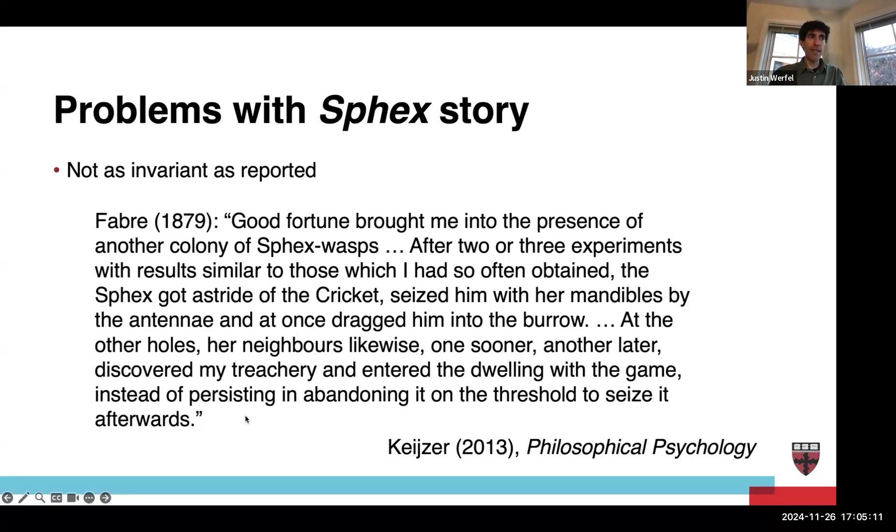Another thing is that this sort of excludes a lot of other stuff that wasps do that is clearly more adaptive to the environment, that is also easy to tell stories about their intelligence. It just ignores all of that in order to focus on this one little thing that they do, where it makes a good story, but where it looks like they're doing something dumb.

It may not even be that it's dumb, right? Part of what the wasp is doing when it comes in and drops the cricket may be positioning it in a way that it goes into the burrow, turns around — it needs to back into the burrow, dragging the cricket. It can't just push it in.

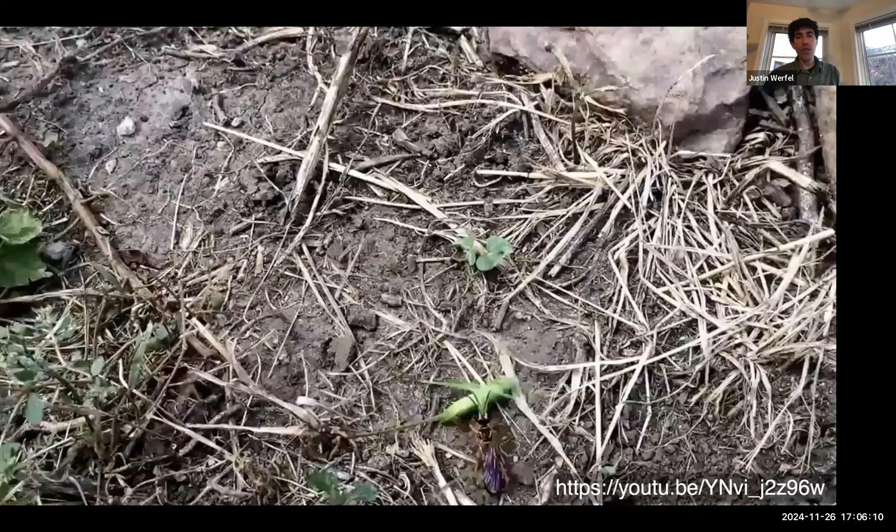Another, I think, valid way potentially to interpret this phenomenon, this observation, is that the wasp is putting the cricket into a position where it is able to pull it into the hole. And if you move it, it has to reposition it in a way that it's able to move it into the hole, and it has to go into the hole to turn around. So again, it's like the eyes with which you look at this change the way you understand it.

And I think the cap on the story is, as this author points out, it's not the insect that is doing this stupid thing, repeating it over and over, even though there's no good reason to do it. It's actually the humans telling the story over and over, despite the fact that that's not really the way that the wasp behaves. And the end of this paper, I think, is very trenchant, and says that there's no reason for humans to remain stuck in an endless behavioral loop when wasps don't.

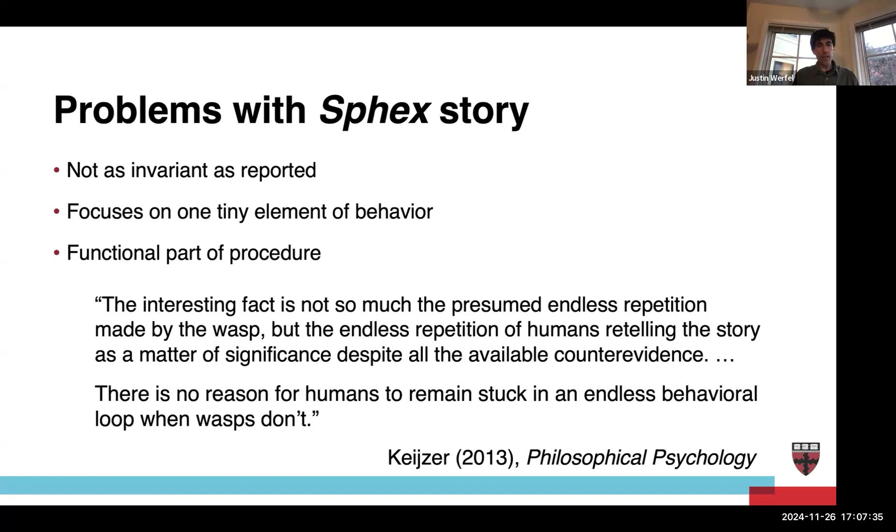So that is kind of the final cautionary tale that I want to share for my inspiration.